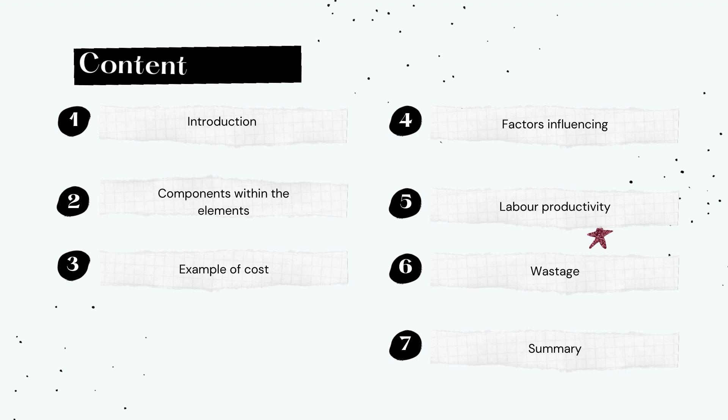Roads play a critical role in economic development and growth, as well as providing significant social benefits. They are critical to a country's growth and development, providing access to employment, social, health, and education services, connecting more people and places, promoting economic and social development. As a result, road infrastructure is the most valuable of all public assets.

So in this video, detailed information of roadworks, including the components of each element, the cost for every work, and examples, will be discussed.

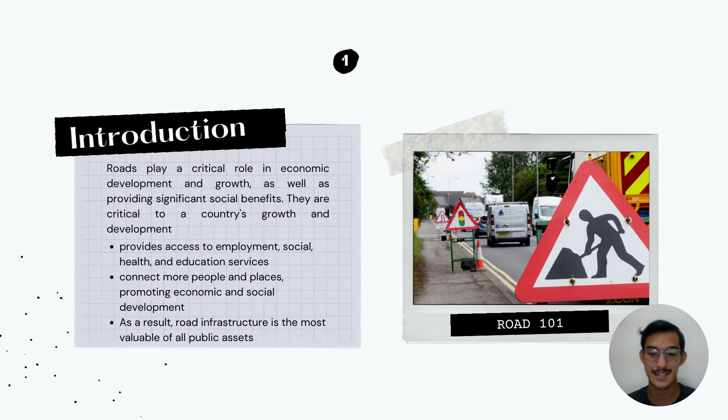Now we move to the components within the elements of roadworks. Different road components play an important role in ensuring road safety and service life. There are five major components within the element of roadworks: first is road surface, slope and retaining structure, next is drainage, next is bridge and other structures, and lastly is traffic or road furniture.

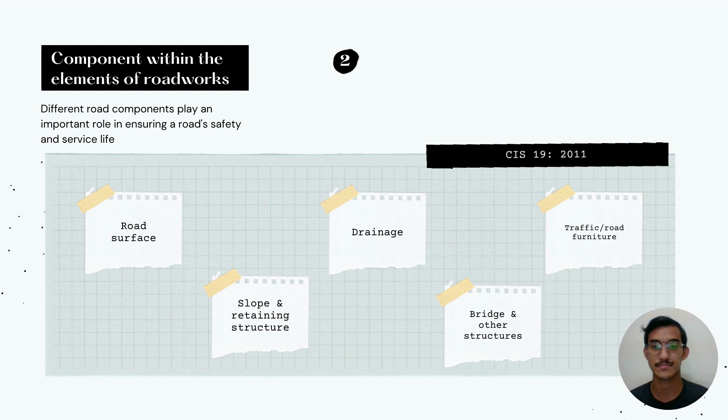The first component is road surface. The road surface is the most important component in assessing the quality of completed roadworks because it is in direct contact with the road users. The elements can be divided into three, which is carriageway, shoulder and verge, and median.

Carriageway is made up of a number of traffic lanes and any associated shoulders, but it can also be a single lane in width. There are two types of carriageway, which is single and dual carriageway.

For shoulder and verge, it is an emergency stopping lane on the side of a road or highway. Shoulders' primary objective is to accommodate stopped vehicles and serve as an emergency lane for vehicles.

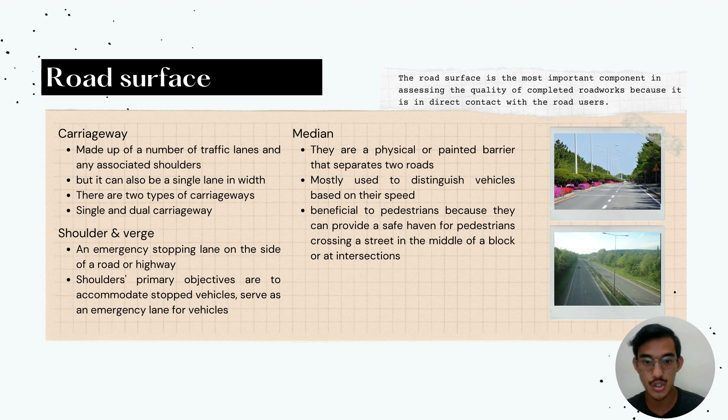For median, they are a physical or painted barrier that separates two roads, mostly used to distinguish vehicles based on their speed. It is beneficial to pedestrians because it can provide a safe haven for pedestrians crossing a street in the middle of a block or at an intersection.

Now we move to the second component of roadwork, which is slope and retaining structure. This component is divided into two elements: cross slope and retaining. Cross slope is used to create a drainage gradient, allowing water to run off the surface and into a drainage system like a street gutter or ditch. Cross slope banks into super elevation in horizontal curves to reduce steering effort.

For retaining, we will talk about its general requirements. For retaining structure, the concrete surface should not have cracks, damage, and spalling. For its functionality, the retaining structure should not show signs of distress, settlement and tension cracks, deformation, tilting, and bulging.

Now we move to the fourth component, which is bridge and other structure. It can be divided into two elements, same as slope and retaining structure: above ground structure and special structure. For above ground structure, pedestrian and motorcycle bridges are one of these elements, allowing people to cross a space, a body of water, or a geographical feature.

There are seven simple considerations when designing this type of construction: trail width, site conditions, geotechnical analysis, abutment plan, permitting, safety, and durability.

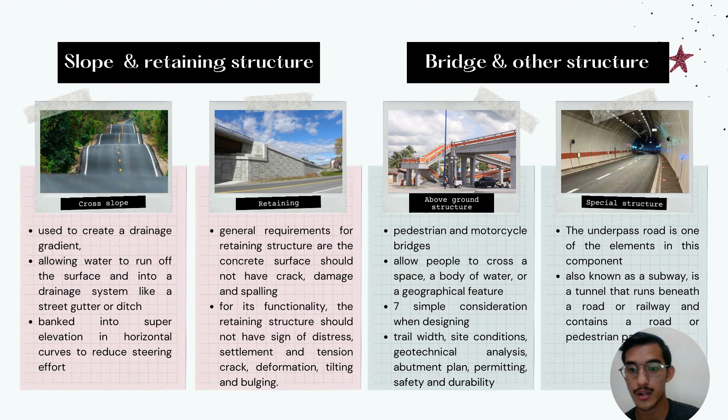For special structure, the underpass road is one of the elements in this component, also known as a subway, which is a tunnel that runs beneath a road or railway and contains a road or pedestrian passageway. That's all from me. Thank you.

Moving on to the next component, which is drainage. The first element is drain. To prevent water seepage into the pavement layers, the pavement surface should be completely impermeable. Furthermore, both the geometry and texture of the pavement surface should aid in the rapid drainage of water from the surface.

Next is drain cover. A drain cover is a grating or a cover with holes that is used to cover a water drain. It allows drainage while also preventing larger objects from being flushed down the drain.

Other than that, sump is also one of the elements in this component. The primary function of a sump in a trench is to drain water that collects at the trench bottom. The water will run off the trench bottom and into a sump pit or reservoir, allowing the trench bottom to remain relatively dry and free of water.

And the last element is box or pipe culverts. Culverts are a tunnel that encompasses a stream or a small rivulet of water and is located beneath a railway or road. It serves as a bridge, allowing traffic to pass through. It is usually installed in areas where there is natural water flow and serves as a flow controller.

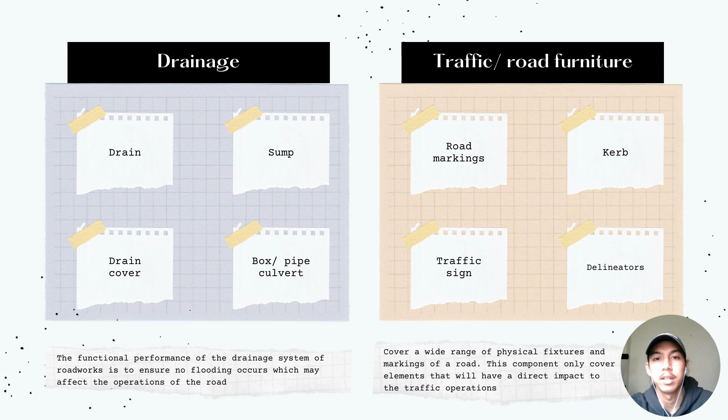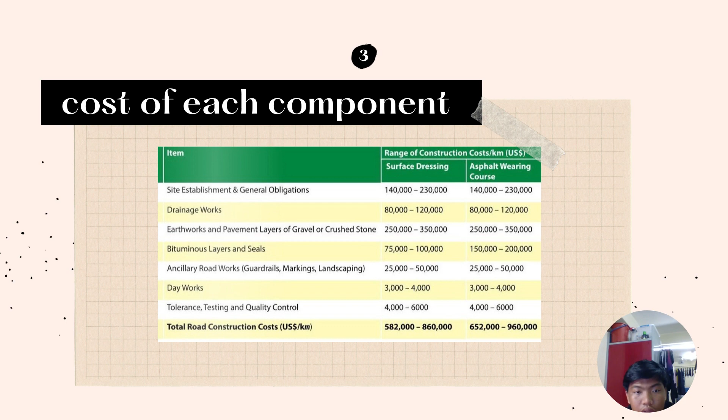So for the roadworks, there are a few items: site establishment and general obligation, drainage works, earthwork and pavement layers, bituminous layers and seals, ancillary roadworks, day works, and also tolerance testing and quality control.

First, we go to the first item, which is site establishment and general obligation. Both of them are included under main contract preliminaries, which are elements that cannot be assigned to a particular element, sub-element, or component. So the average cost for site establishment and general obligation is 772,826 ringgit per kilometer.

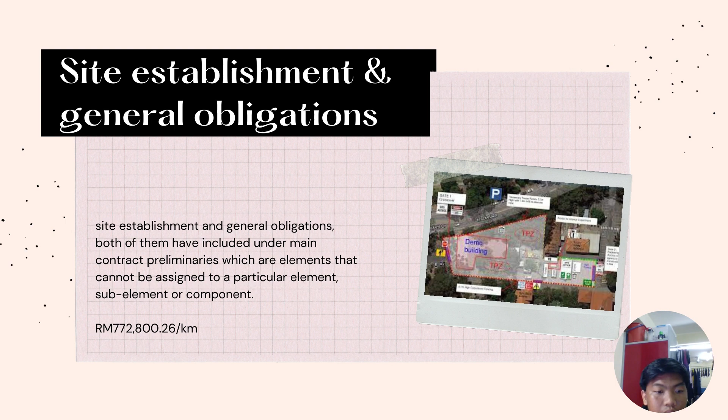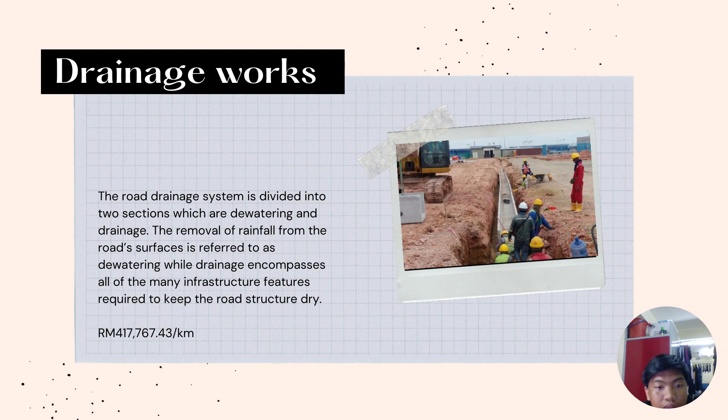Next, we go to the drainage works. The road drainage system is divided into two sections: dewatering and drainage. The removal of rainfall from the road surface is referred to as dewatering, while drainage encompasses all of the many infrastructure features required to keep the road structure dry. The average cost is 417,767 ringgit and 43 cents per kilometer.

For the earthworks, earthwork activities are costly and subject to a number of limits due to the significant environmental and social impacts they have on the region surrounding the building site. The average cost for earthwork is 1,253,239 ringgit 90 cents per kilometer.

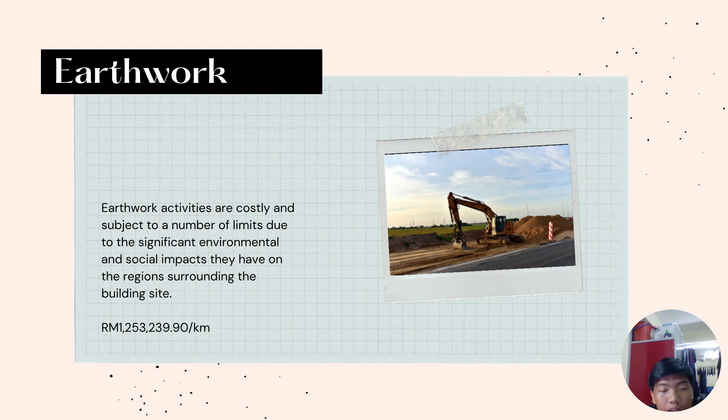Next, we go to the bituminous layers. Bituminous layers or sprayed seal is impermeable to water, a thin coating of binder sprayed onto a pavement surface with a layer of aggregate integrated. There are two different prices: for the surface dressing, the average cost is 365,548 ringgit 19 cents per kilometer, while for the asphalt wearing course, the cost is 731,129 ringgit 20 cents per kilometer.

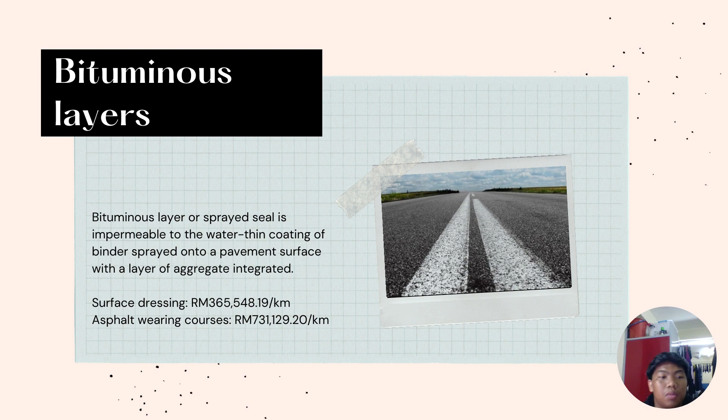For the ancillary roadworks, there is road furniture used to make the flow of road construction smooth, and a few ancillary roadworks that have been offered in the catalogue are guardrails, markings, and also landscaping. The average cost is 156,622 ringgit and 83 cents per kilometer.

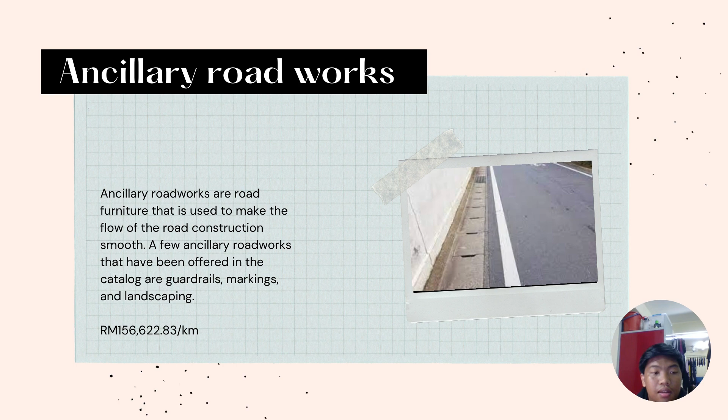Day works is a method of paying a contractor for specific instructions based on the cost of labor, materials, and plant, plus a markup for overhead and profit. It is typically utilized when works cannot be priced normally. The average cost for day works is 14,620 ringgit 21 cents per kilometer.

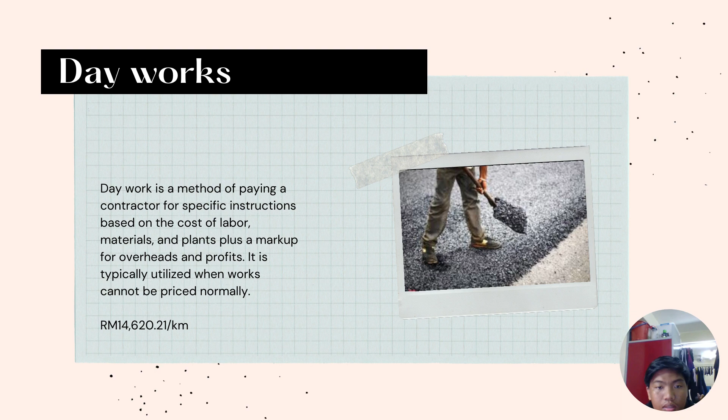Now we go to the last item, which is tolerance testing and quality control. Roadworks have several soil tests that must be performed prior to the start of construction work in order to understand the nature and quality of the soil. The purposes of soil tests are to analyze the quality of the soil, to determine the moisture content present in the soil, to determine the compaction characteristics of various soil, to find out the strength of the subgrade, and to determine the nature of the soil. The average cost for this item is 20,882 ringgit and 82 cents per kilometer.

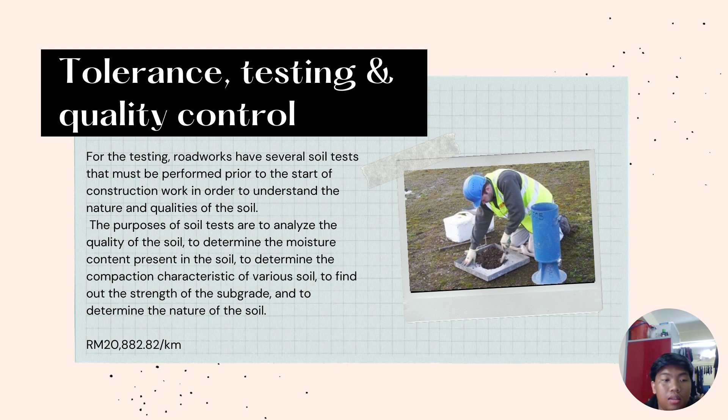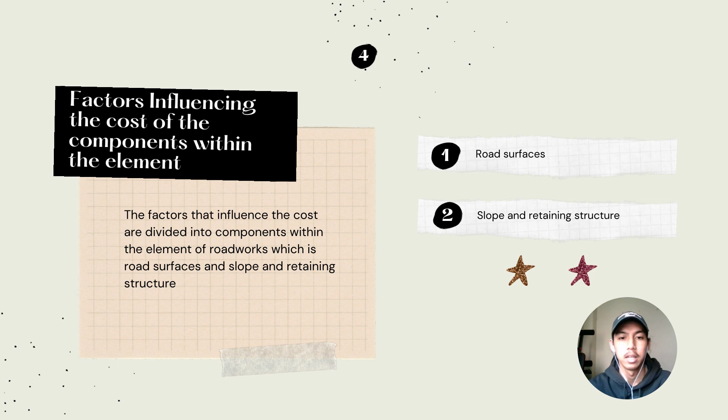So the factors that influence the cost are divided into components within the elements of roadwork, which is the road surface and also the slope and the retaining structure.

Moving on to the first component, which is the road surface. Asphalt is one of the most cost-effective and cost-efficient paving options. Asphalt may survive for decades if a road, parking lot, or any other surface is adequately paved and the necessary maintenance practices are used. So the quantity of asphalt needed for a certain project can be determined by the length, width, and depth of the prepared site, and higher quantity will result in higher cost. Also, the expense of transporting asphalt from the manufacturing plant to the project site is a factor of the cost estimation components that is also influenced by the type of asphalt required. For example, hot mix asphalt versus warm mix asphalt will make a difference in transport options.

Another factor that affects the cost of road surface is the type of material used, the type of asphalt used. The cost of asphalt varies depending on the kind of asphalt used, which includes hot mix, warm mix, porous, perpetual, quiet, and recycled asphalt. The most common type of asphalt used in roads and pavement is the hot mix.

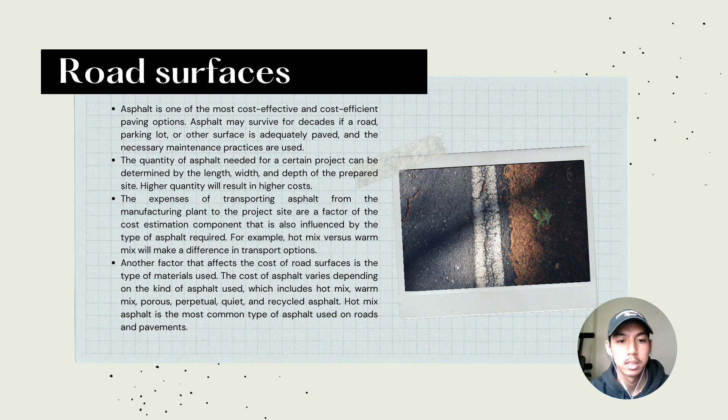Moving on to the next component, which is the slope and retaining structure. A retaining wall or structure holds back materials, often earth, and keeps it from eroding. Its primary role is to push back against the gravity of the earth behind it.

One factor that affects the cost of retaining walls is the size of the retaining wall itself. The longer, wider and thicker the size, the more material is needed for construction. It will also take more time to build and require larger and stronger reinforcement for the structure.

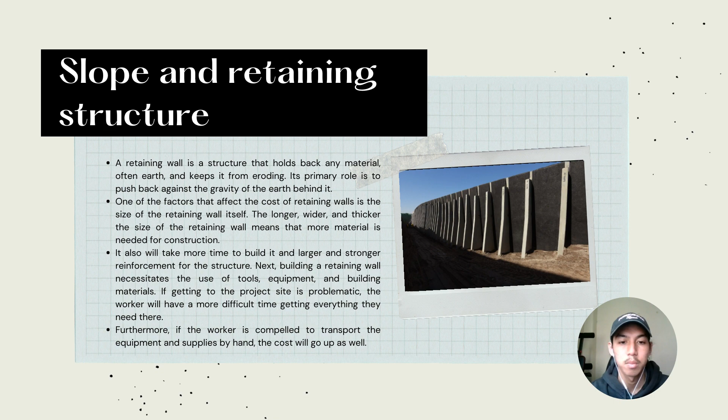Building a retaining wall necessitates the use of tools, equipment, and building materials. If getting to the project site is problematic, the worker will have a more difficult time getting everything they need there. Furthermore, if the worker is compelled to transport the equipment and supplies by hand, the cost will go up as well.

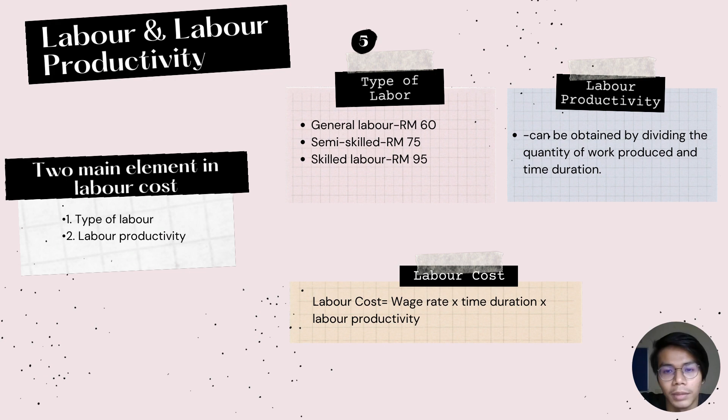The information about labor is divided according to the work done through the roadwork construction process. Firstly is site clearance and formation level. The work could be removing topsoil, bushes, trees, and so on.

Site clearance usually does not require skilled labor, as it will be performed by general labor. It can be done by hand or machinery. For complex work, usually plants such as bulldozers and tractor shovels are used. If using plant or machinery, labor productivity will be higher and the time to complete the work will be reduced.

Secondly is the excavation work. The function of excavation work for roadwork is to provide utilities and services. It is also performed by general labor, normally with the help of the excavator.

When estimating, the QS needs to check whether the plant cost includes the driver or not. If not included, the QS needs to add general labor as the driver when estimating.

Next is the paving work. There are many types of layers and materials in this work, such as asphalt, bituminous, aggregate, crusher run, and so on. This layer also depends on the type of paving used. There are two types of paving: flexible paving and rigid paving.

Paving work is generally performed by a gang of labor. Their job is preparing and mixing each layer with material according to the type of pavement. Plant and machinery are also required for paving work to compact the layer.

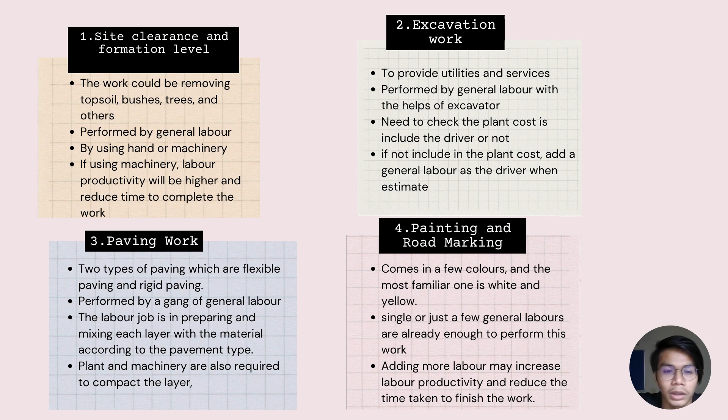I'm going to continue the presentation with wastage allocation. The first thing you must know about wastage allocation in this industry is that it can be defined as any inefficiency that results in the use of equipment, materials, labor or capital in larger quantities than those considered necessary in the construction process.

That means, in simple terms, waste is something extra during or after the construction process.

Next, I'm going to move on to the causes of wastage. There are a few things that cause wastage in this industry. The first is manpower, due to unskilled laborers, lack of supervision, substandard contractor personnel, and inexperienced field supervisors. The second is professional management.

Management causes wastage because of poor planning, poor information distribution, and also lack of coordination among construction stakeholders.

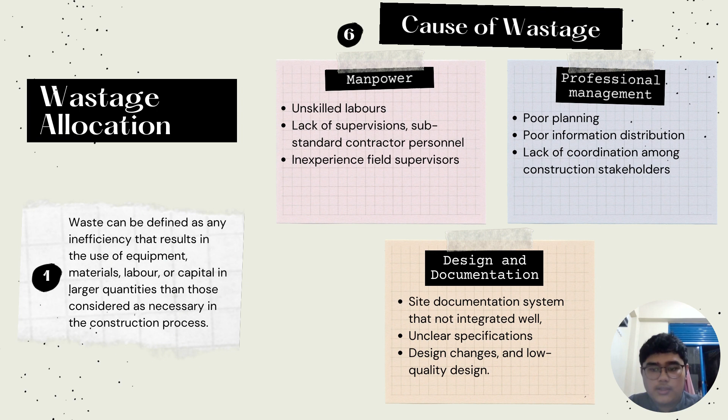The third thing that causes wastage is design and documentation, which is due to site documentation systems not integrated well, unclear specifications on how construction will be done, last minute design changes after everything has been drawn on the plan, and also low quality designs.

The second thing about wastage allocation: there has been a study from the Department of Civil Engineering, University of Indonesia. They conducted several studies to identify different types of construction waste and their sources. The result indicates that excess from soil excavation, timber, and reinforcing bars are the most dominant waste produced in highway construction projects, including roadworks construction, which is mainly caused by the roadworks construction.

Continuing with the causes of wastage, there are a few more things. The first is materials, which is due to low quality materials, late delivery of materials not arriving according to schedule, and also improper material handling on site.

The second thing is work execution by the contractor, which causes wastage because of incorrect construction method and also lack of construction equipment and unsuitable equipment.

The last but not least is external factors, which is the site condition itself, caused by bad weather or damage caused by a third party, such as robbery or burglary on the site. I think that's all from me, I'll pass it on to the next presenter. Thank you.

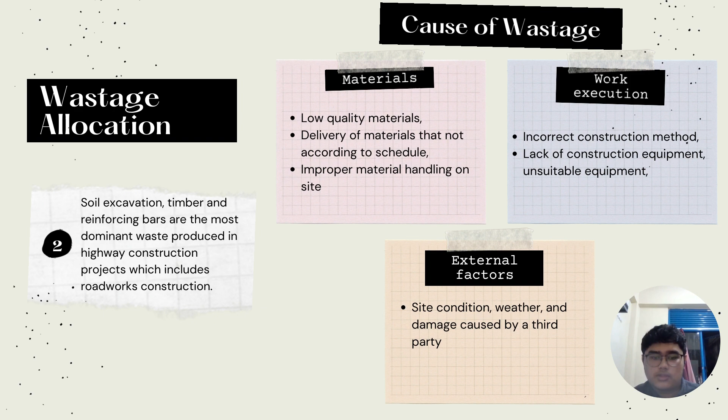Next, we go to the example of yield upgrades for two items: drainage and earthwork. Now, for drainage: a 45 centimeter culvert, 10 meters long, is being installed. Experience indicates that a small backhoe and operator and two laborers can install 3 culverts per day, and the culvert crew use a flatbed truck to transport themselves and the pipe each day.

For the assumptions: the rate of the backhoe is 250 ringgit 59 cent per hour, the truck is 50 ringgit 12 cent per hour, the pipe is 62 ringgit 65 cent per meter, and the rate for labor is 60 ringgit per hour. A backhoe needs 6 hours to fix 3 culverts, while a truck needs 9 hours to fix 3 culverts.

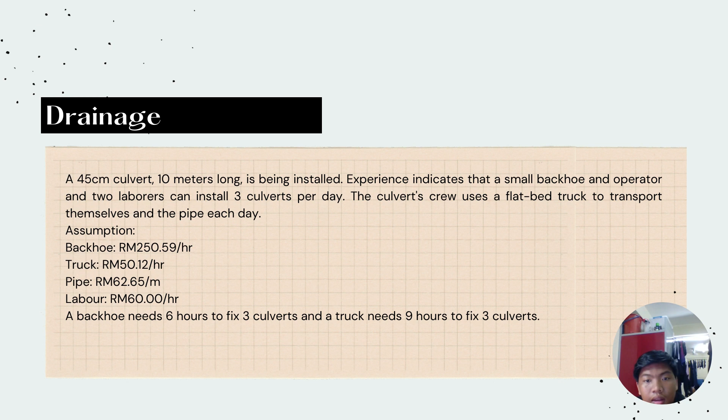Now we go to the solution to fix 3 culverts. For the backhoe, the machine hour is 6 hours, so we time this with the machine rate, which is 250 ringgit 59 cent, and the total is 1,503 ringgit 54 cent.

Then we go to the truck. For the truck, 9 hours, which is the machine hours, times with the machine rate of 50 ringgit 12 cent, and we get 451 ringgit 8 cent.

For the pipe, we need 30 meters because to fix 3 culverts, since 1 culvert is 10 meters, we times with 3 to get 30 meters, then times with the rate of 62 ringgit 65 cent, and we get 1,879 ringgit 50 cent. For the labor, we use 2 laborers times with the labor rate of 60 ringgit per hour, and we get 120 ringgit. The total is 3,954 ringgit 12 cent.

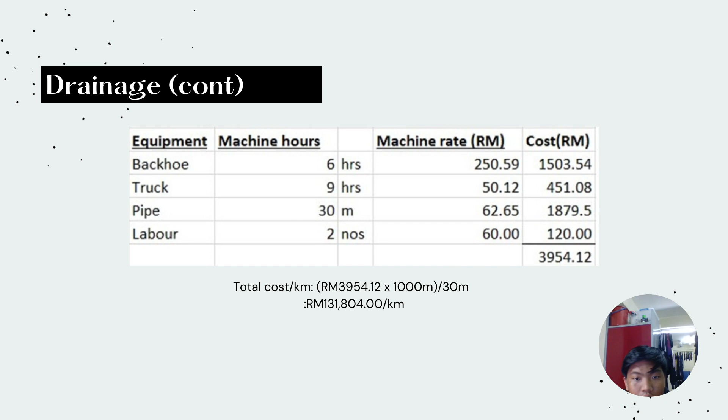To get the total cost per kilometer, we times with 1,000 meters and then divide by 30 meters, and we get 131,804 ringgit per kilometer.

Next, we go to the earthwork. The question is: a 6.0 meter subgrade on 30% slope with a 1.5:1 fill slope and 0.5:1 cut slope, with a 1 foot ditch and a 20% shrinkage factor, would be approximately 2,100 bank cubic meter per kilometer for a balanced section. An average production rate in common material, with no rock, from an equipment performance handbook, might be 150 bank cubic meter per hour for a 300 horsepower power shift tractor with ripper, and the assumption is the tractor cost is 334 ringgit 12 cents per hour.

So to get the total excavation hours, we divide 150 bank cubic meter with 2,100 meter cube per kilometer, and we get 0.07 kilometer per hour.

And to get the total cost for excavation, we divide the rate for the tractor, which is 334 ringgit 12 cents, by 0.07 kilometer per hour, and we get 4,773 ringgit 14 cent per kilometer.

I think that's all from me. Thank you.

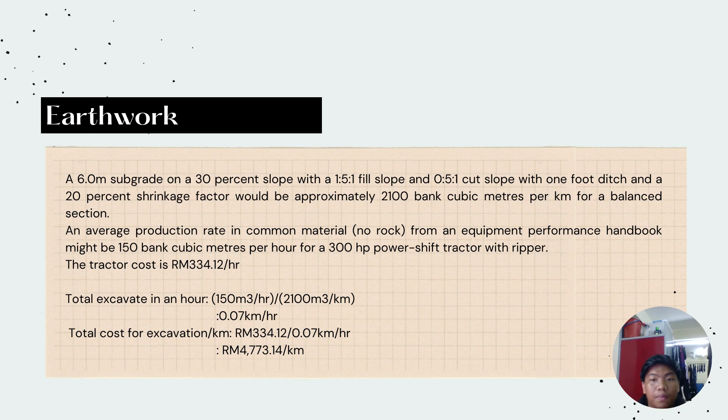To summarize, the road surface, slope and retaining structure, drainage, bridges and other structures, and traffic or road furniture are all components of roadworks. The ultimate goal of a road is to efficiently transport people and goods from one location to another while maintaining a high level of comfort and safety.

We can see that the cost varies depending on the material used, size of the work site, quantity of materials needed, transportation options, and many more. In terms of labor, most of the work is done by general labor; skilled labor is less required for road construction compared to other work.

About wastage, it has been elaborated above, generally consisting of usual construction work errors and influenced by the size and duration of the project. From the example of build-up rate, we can see the details in estimating the total cost, like the rate of labor, the machine that the contractor uses, and also the rate for each machine. That's all from our group. Thank you.